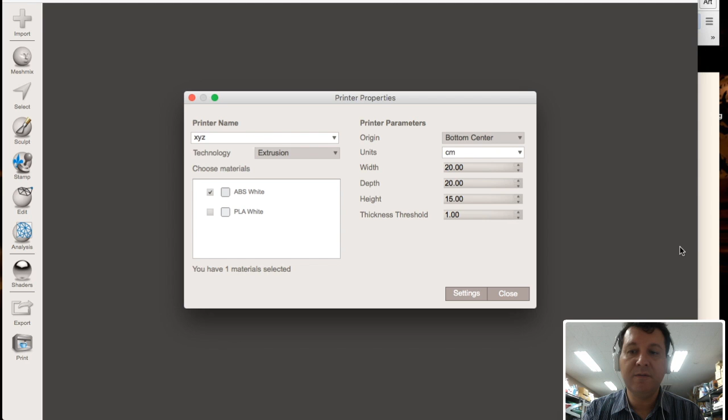My thickness threshold, I've been using 1. I don't know if that's the best setting. So that might have some things that can be changed, but at this stage it works for me on that setting.

So back here in Meshmixer, if I've set up my printer and that's okay, I'm going to now import an object. So it gives me different options here. I can pull things from my 123D cloud. I can open a rendered file, or I can just hit import an STL file. So I'm just going to import, and I'm going to grab myself a R2D2 STL file. So this is just a USB pen.

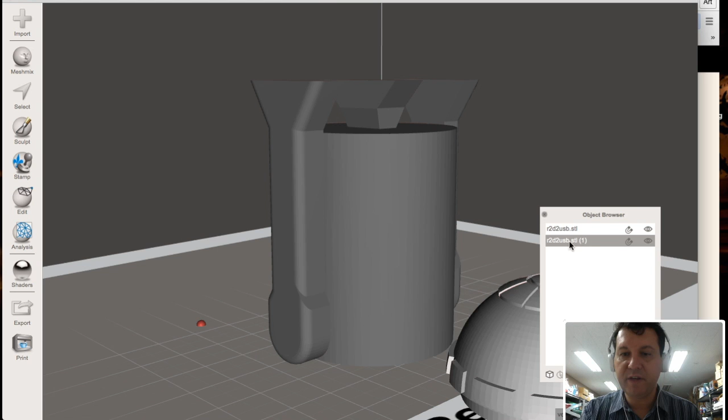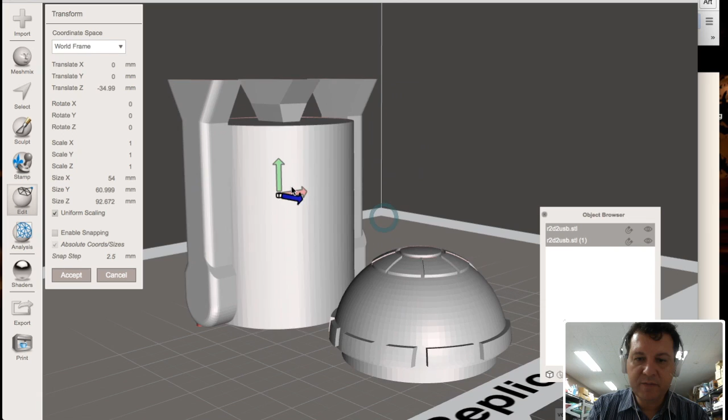Alright, so I've got two pieces here. I've got his head, and I've got his body. So if I select both in the object browser, and I'm just going to move them around a little bit, so they're both around. So I'm just going to hit Edit, Transform, and then I'm going to move them back into space a little bit. So if I orbit around, the bottom says that it's still on a MakerBot.

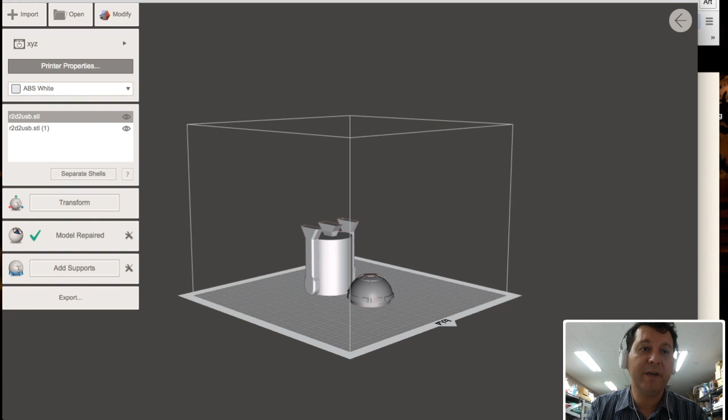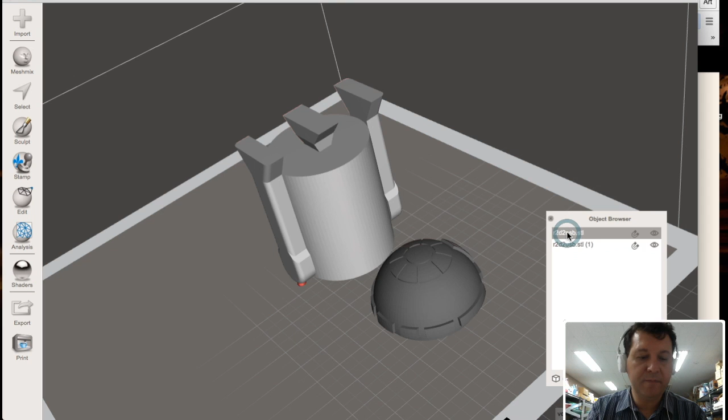So I just want to change that down to my XYZ. So all I've done here, I'm just going to back up here. I've just gone down to my print button after I've set up my printer, and here's my XYZ printer bed showing up. So I've got my two objects here. I've got R2D2 and his head. There's two files, right? And I want to have them both selected because they're both in the stage, right?

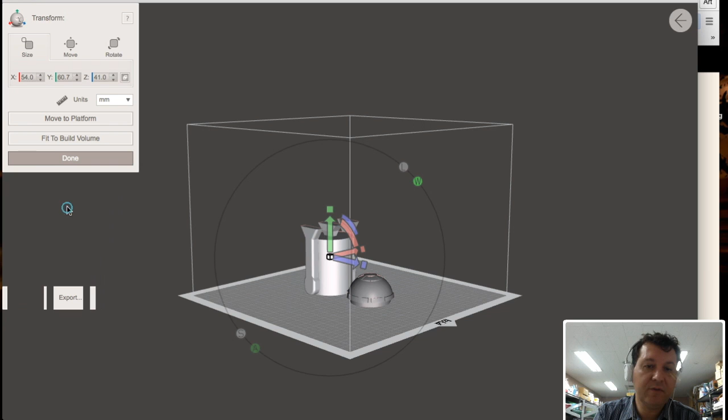So the next bit, what I want to do is I want to go back here. Instead of printing it directly, I'm going to hit export. I'll go back to the printing option instead of export. So now I've got these two objects in here. I can transform them around still. I can move them individually within that. I can scooch them around. I can also repair the model here. It already says that it's done.

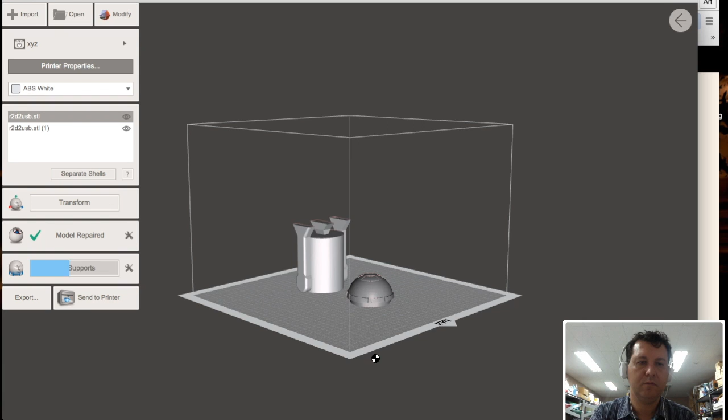If I've got bits that are not flat or might have overhangs, I can hit Add Supports, and it calculates to see if it needs any supports for any objects. So when I did that, it went through and it thought that it needed some supports on this back side. It seems like it has valid supports. These supports normally are easy to remove with a scalpel or whatever. I don't necessarily know if those are really needed, but hey, they're there.

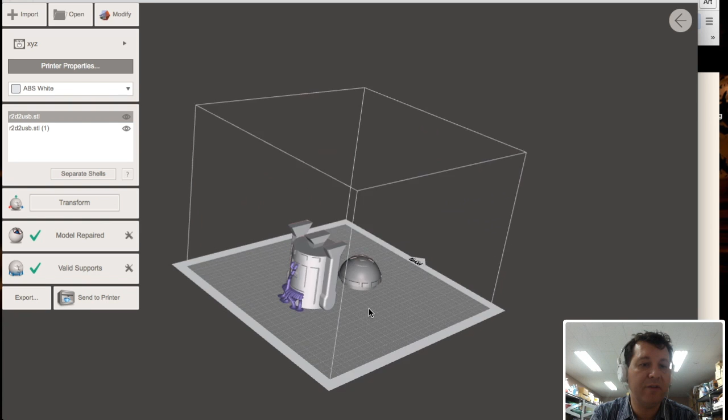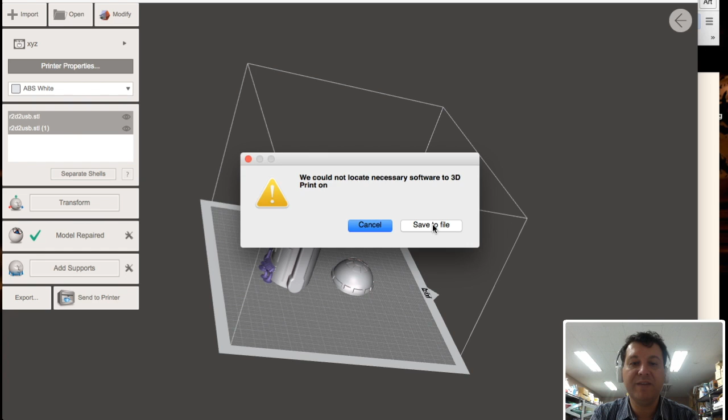All right. So once this is all happy, I can select both of them, and then I can hit Send to Printer. So with the XYZ, it won't actually send it directly to them. So what I have to do is I have to hit Save to File. So now I'm just going to save them on my desktop.

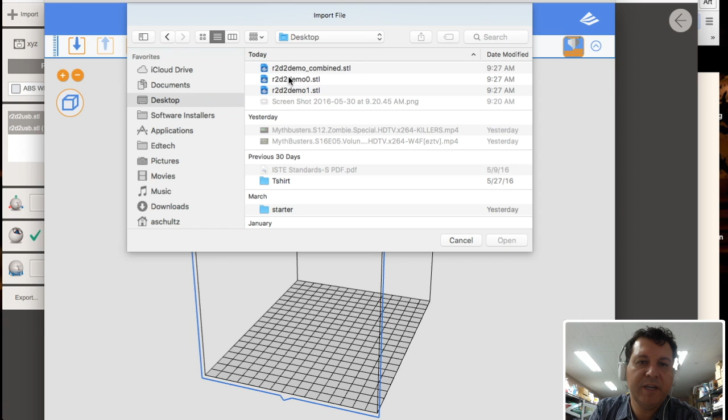Now I would jump over to the XYZ application, and I can close out that lovely little prompt, and then I can hit the down button here. I go back down to my desktop, and then I've got my 3 options here. It's a demo combined, and then the 2 pieces to my demo. So if I click on that, it should open both of them in the same space.

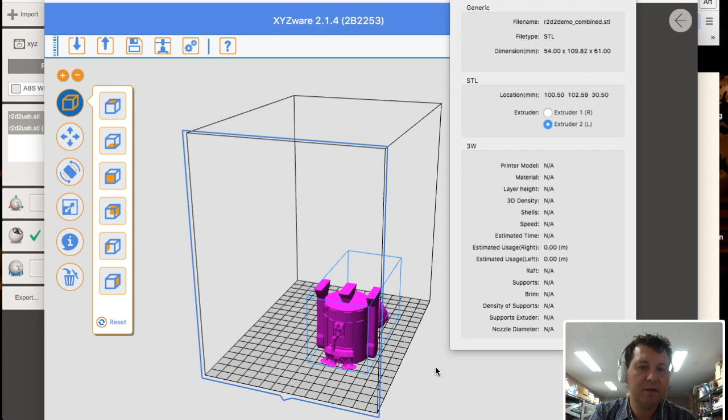At this stage now, I can actually change around with my printer where they're going to land, but I can also tell which extruder we're using for the ABS. And normally it will update the color. All right, so I've got those in there, and I can now, with my printer connected, send this print job.

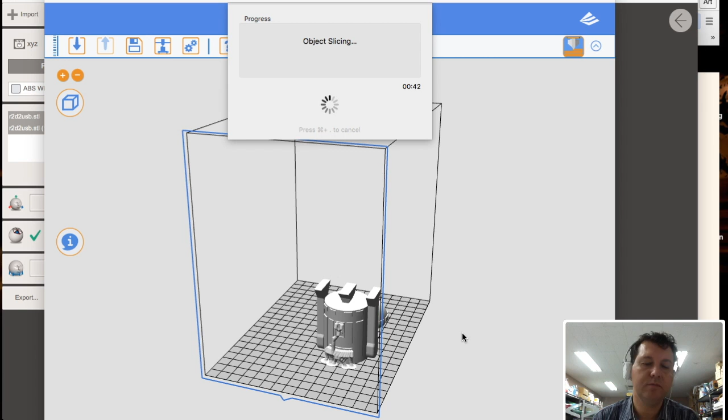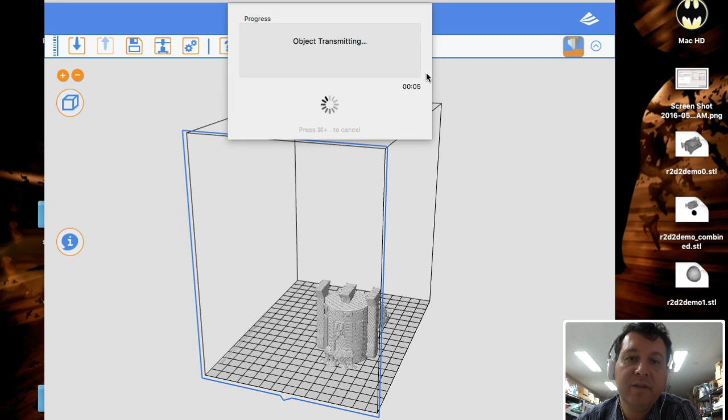Okay, so my slicing is now complete, and I can send this to the printer now just by hitting the print button, and otherwise I can save and cancel the print. So I'm going to print this, and now it's transmitting, and the transmission tends to be a little bit quicker as well working in this method. So sometimes if the print job does not want to send for whatever reason, powering the printer down and repowering it tends to fix the problem. And that time it took nicely.

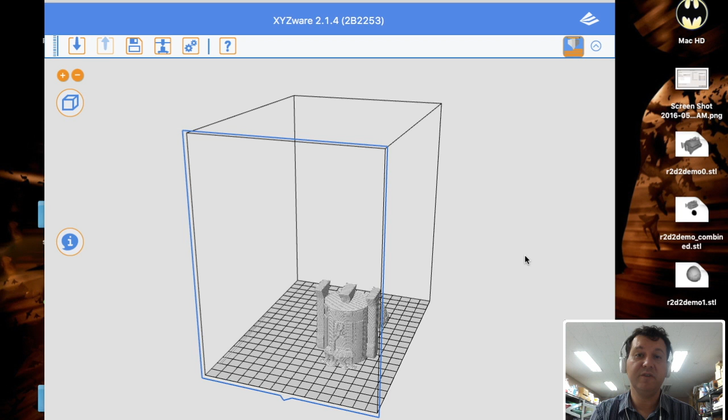Using this procedure should speed up and improve your method for getting 3D models into the XYZ 3D printer. Hopefully you have better results like I have. It's not foolproof, and there will be things that don't work.